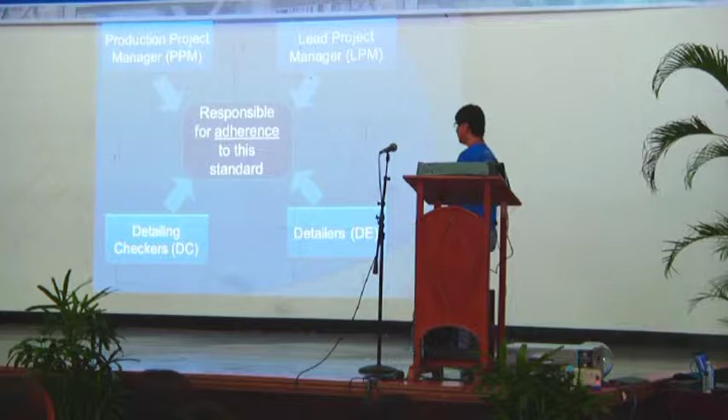Why adherence? Adherence means it is a continuing obeying of rule. So standards, if you say standard, it is like a rule. So in order for us to produce the highest quality of shop drawings, we are obeying this rule. The rule is like the standards. We are obeying these standards.

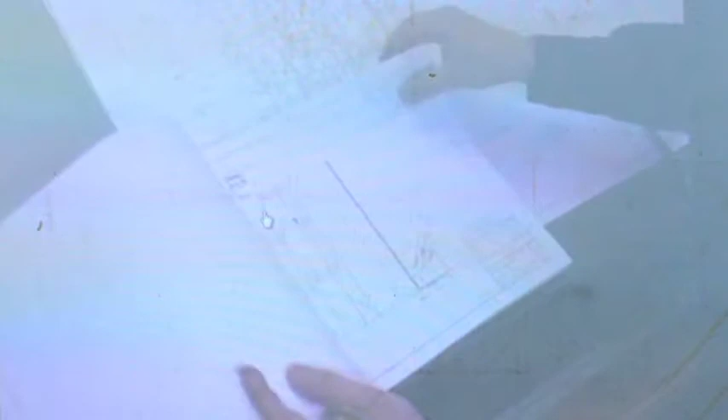How that change will affect all the holes in those beams. In addition, if a member has been changed on the shop drawing, the detailer must also change the erection drawings that will be used in the field. All this information is developed with the help of computers, and it can be downloaded to the drill line in the shop or to the angle master to show them how to drill holes in the angles.

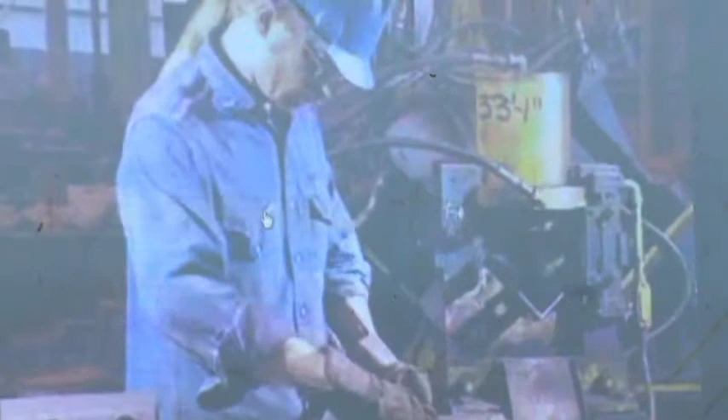But it's important to realize that although these critical tasks are done with the assistance of a computer, they are not done by the computer. The detailer's training, skill, and expertise is the key to the process. It is the detailer's ability to translate the engineering drawings of a large structure for the fabricator so that the fabrication shop will know exactly what must be done to prepare the steel.

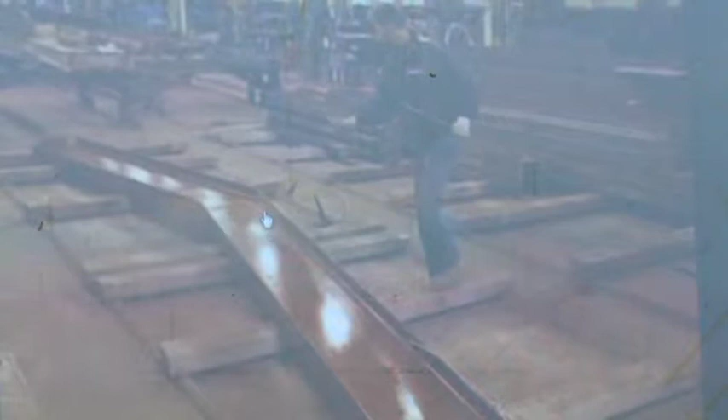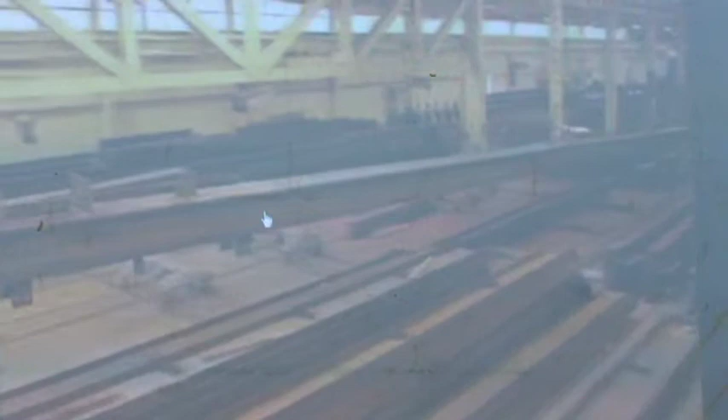The detailer will also indicate the preparation, cleaning, and painting of the materials depending on its specification. If that weren't enough, the detailer may also have to consider and take into account shipping requirements, sometimes even the cranes that will be used in the field, and how those cranes will load and unload members from the truck.

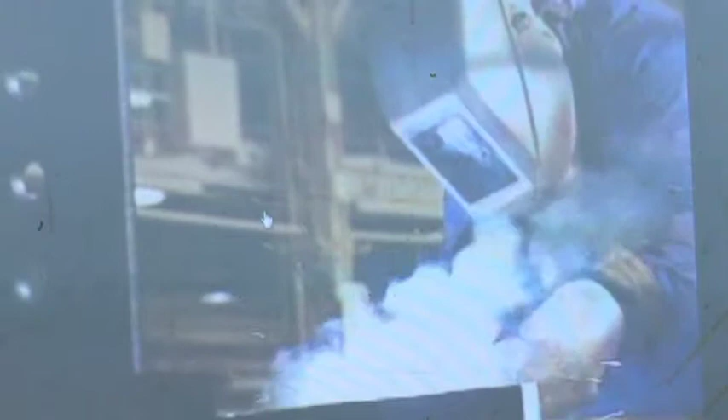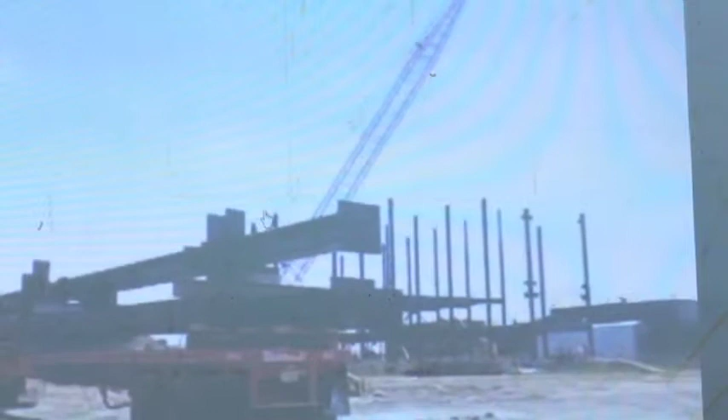Before the fabrication shop actually drills and cuts the steel members, the detailer must submit his shop drawings to the engineer of record for approval to make sure that the shop drawings are fully compliant with the engineer's design. It's clear that steel detailing plays an important role in joining steel members, even before the beams and girders arrive at the construction site.

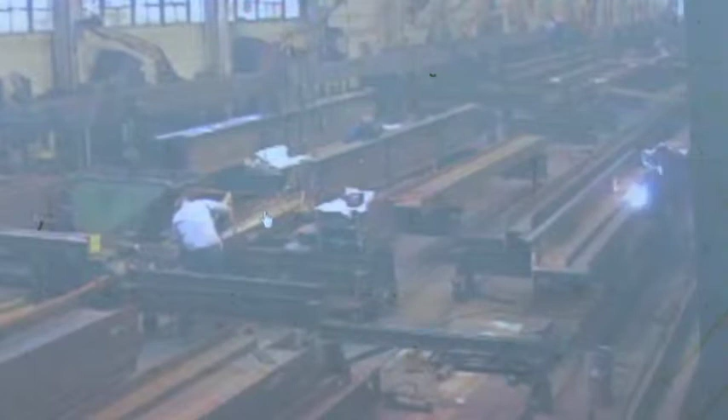This is one reason why on-site building with steel is so much faster than is possible with other materials. At the fabrication shop, the steel is cut, punched, and pre-assembled as much as possible according to the detailer's drawings. These drawings can be used to generate computer disks that will drive the shop's fabricating machinery to cut and drill the steel with absolute precision.

If cutting is necessary, the operator inputs the size and the desired length of the member. The stock lengths of steel will enter the cutting machine by conveyor. An automatic arm stops the stock at exactly the right point, and the blade cuts the steel. The piece will then be labeled and rolled out. From the cutting area, the steel members will travel on a conveyor to the next station, where holes will be drilled to make the bolted connection.

The machine operator inserts the disc into the computer as the member is fed through the drilling machine, pushes a few buttons, and the computer takes over. As the steel automatically goes through the machine, its exact location will be monitored by laser measuring devices, so it will stop precisely where the holes must be drilled. All of the holes will be drilled in one pass as the column goes through the machine.

The operator is able to see different views of the member on a small monitor, noting the number, location, and size of holes needed, as well as the precise location of the drill bit. When the holes have been made, the member will travel on conveyor to the next station. The coping machine burns steel to cut members like a saw, or it notches the steel and makes holes.